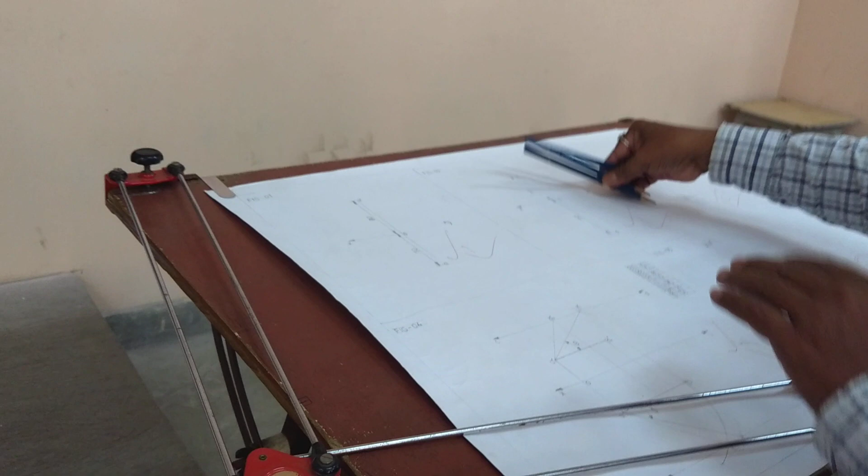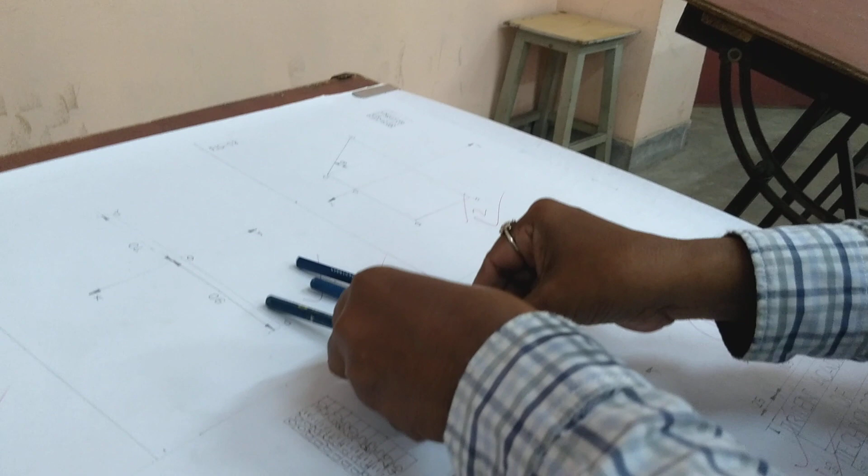Just mark the arrangement also. This is my drawing sheet, 3 pencils. This is the mini drafter. I am also ready. Simultaneously, I will show you the blackboard along with your drawing sheet arrangement. Just mark: mini drafter, drawing sheet, and 3 pencils. Okay, how will we proceed? Just mark.

As per international standard, we have to draw the boundary line of a drawing sheet, because when we purchase a drawing sheet from the market, it may or may not be of proper dimension. That's why we have to draw the boundary line of our drawing sheet. So use your 2H pencil for the boundary line.

Use your mini drafter and draw the bottom boundary line. Suppose this is your mini drafter scale, mark the point here. This gap is 20 mm. From the bottom edge of your drawing sheet, measure 20 mm and mark one point. After approximately 50 mm, mark the second point, also 20 mm from the base of the drawing sheet. Now you have 2 points on the drawing sheet.

Use your large scale and draw the line. Gradually extend that line, right side as well as left side. This is the bottom boundary line. Now come to your drawing sheet. This is the arrangement.

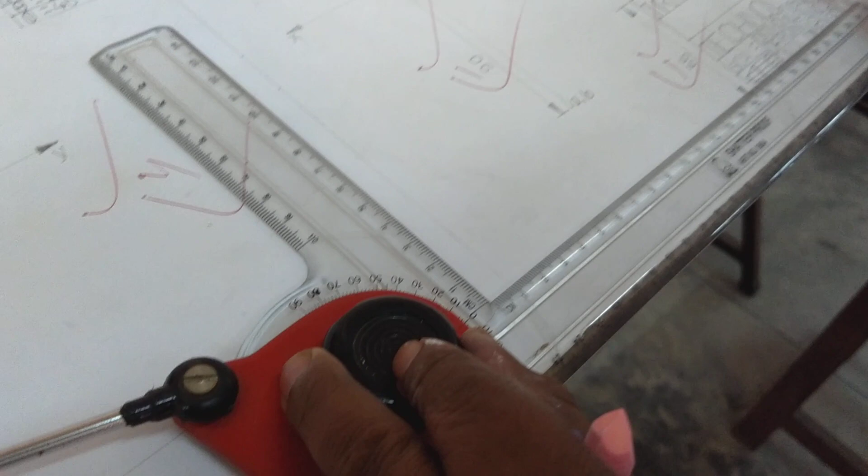Set your mini drafter. This is the long scale. With the help of your vertical scale, measure 20 mm and mark one point. After 50 mm, mark the second point. Now join the 2 points and draw the line. Gradually extend that line to the right side, and similarly extend it to the left side also. So the bottom boundary line is over. Just mark the bottom boundary line.

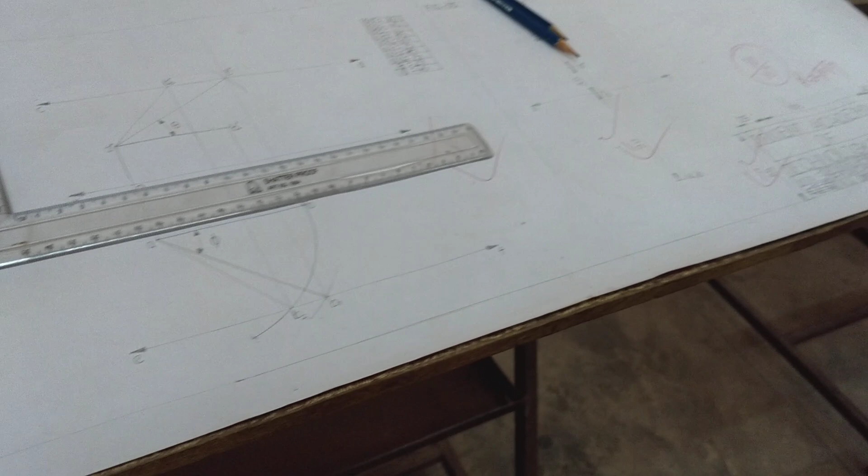Come to the right side boundary line. The right side boundary line is also 20 mm from the right side. With the help of your drafter, mark one point 20 mm from the right edge of your drawing sheet. After 50 mm, mark the second point, also 20 mm from the right edge. Now join the 2 points and extend downward as well as upward. Come to your drawing sheet now.

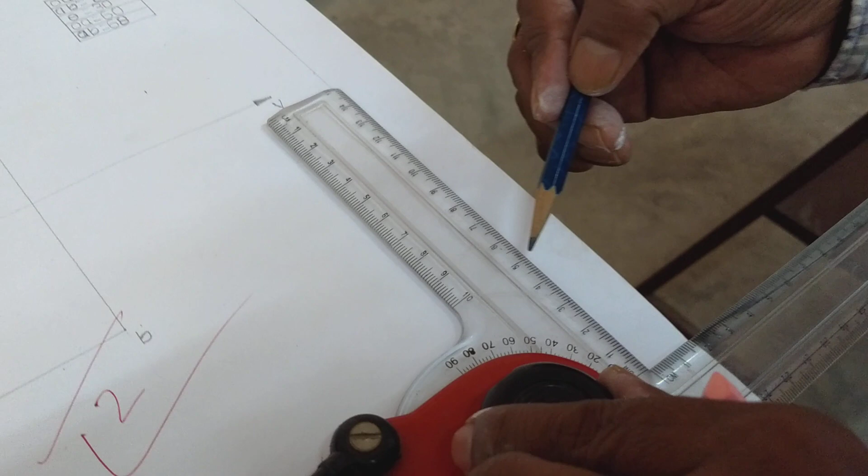From the right side edge, measure 20 mm and mark one point. After 50 mm, again measure 20 mm and mark the second point. Now join the 2 points and draw the line, extend that line upward as well as downward. So the right side boundary line is also over.

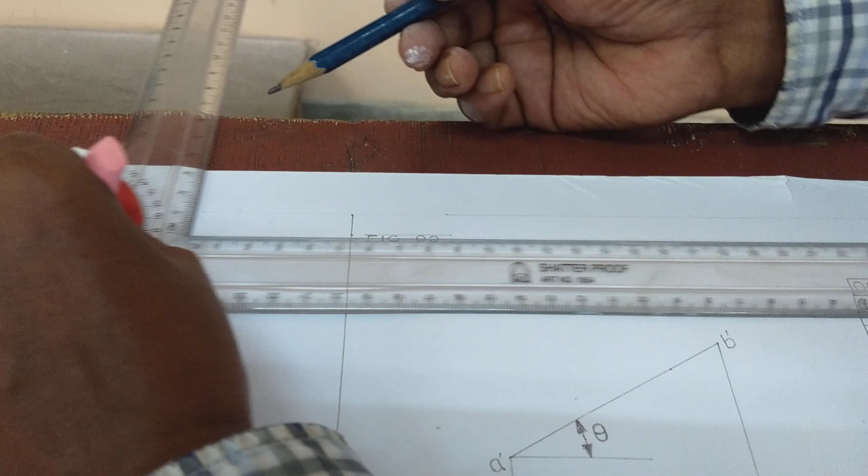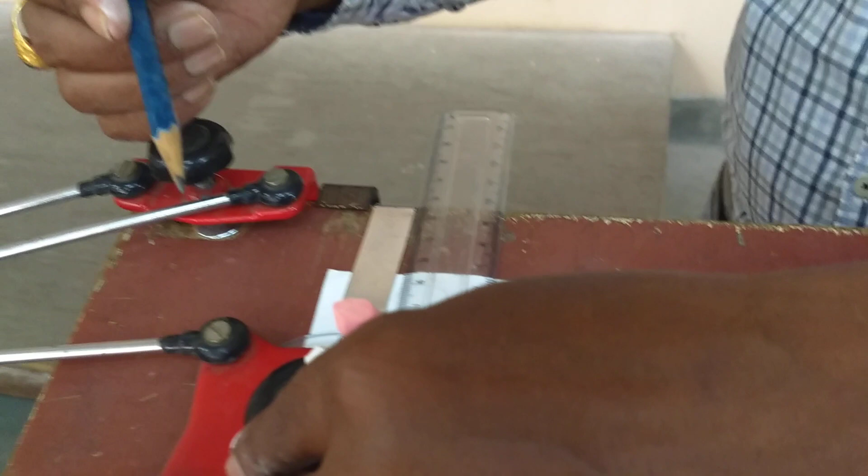Then the top boundary line. Measure 20 mm from the top edge and mark 1 point. After 50 mm, again take 20 mm and mark the second point. Now join the 2 points and gradually extend the line towards the right side as well as the left side. Just mark, here the problem arises, because the drafter will not move comfortably towards the left side. So use your large scale and extend that line. Don't put more pressure upon the drafter. Complete that line towards the left end.

I will do the same thing. I will measure 20 mm and mark 1 point. Measure 20 mm after 50 mm and mark the second point. Extend it towards the right side gradually. Similarly, extend towards the left side gradually. I already told you, in your drawing sheet, when you move towards the left side, the drafter will not move. So use your large scale and extend that line.

Now come to your left side. On the left side, measure 25 mm and mark 1 point. After approximately 50 mm, again mark 25 mm. Now you have 2 points; gradually extend towards the top. Now the problem arises, the drafter does not move. So use your large scale and extend that line. Okay?

And extend that line. Come to the blackboard now. My drawing sheet, that is your drawing sheet, and this is my drawing sheet. Simultaneously I want to show you.

Mark 25 mm as 1 point. After 50 mm, second point, 25 mm from the left side. Now join the 2 points. Gradually extend downward as well as upward. Now if a problem arises, use your large scale and extend it. So the boundary line is over.

Somebody may ask why you draw the boundary line. Because the boundary line is required to convert untrimmed size paper into trimmed size paper, so that we get the perfect prepared drawing area. This is my perfect prepared drawing area, and outside the boundary is not my area. So what I will draw only inside my area, that should be perfect. To get a perfect prepared drawing area, the boundary line is required.

Now we will draw the title box where you write your personal data. Same thing, same pencil. Just measure, this measurement is 65 mm. From this point, measure 65 mm. That is the breadth of the title box. And you mark, draw the line with the help of your drafter.

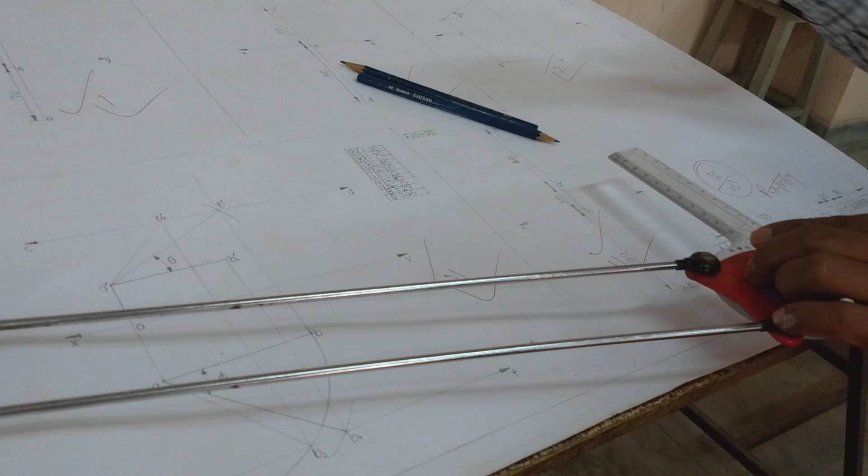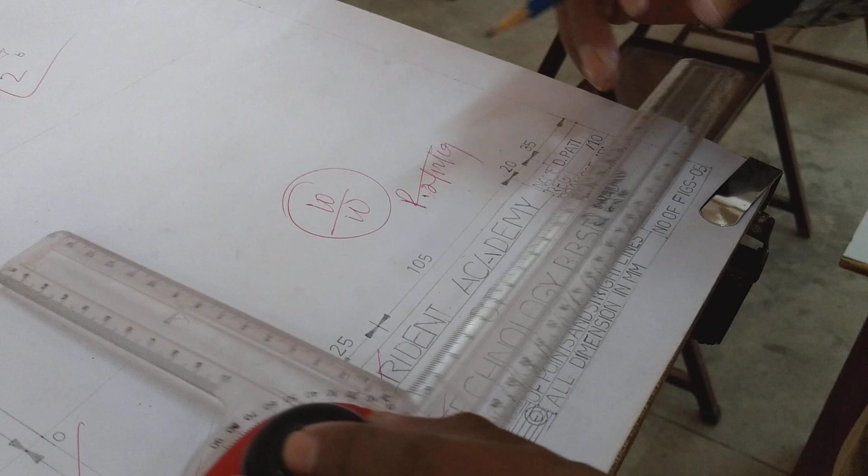Just mark how I will draw my title box. You measure 65 mm from the bottom boundary line, anywhere, no problem. Mark one point at 65. Now you draw the line, and the length should be 185 mm, and close the box. This is the position of the title box. Breadth is 65 and length is 185 mm, as per international standard.

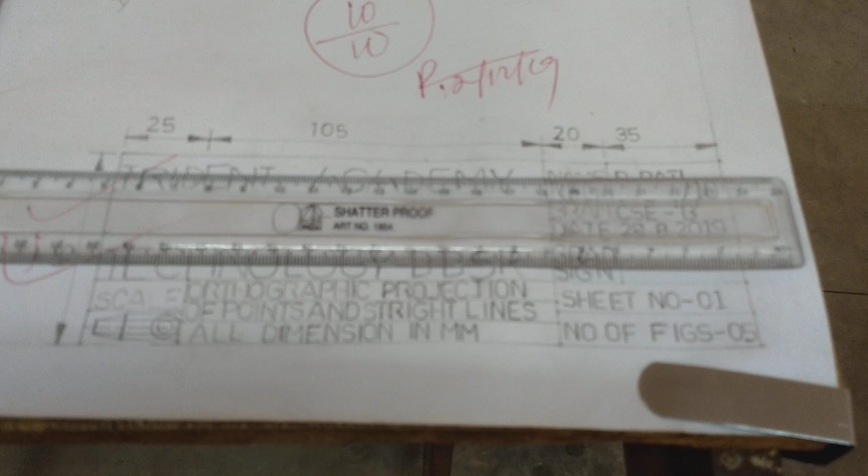Clear? So what will you draw inside the title box? Just to mark. Now the pencil is changed to a 1H pencil, because I want to draw the construction line, that is the construction of the title box. For construction lines, a 1H pencil is used.

Now you measure 20 mm from the bottom edge of the drawing sheet, that is the bottom boundary line. 20 mm. We always tell the dimension in mm, because mm is the unit of dimensioning. And with the help of your drafter, draw the horizontal line gradually.

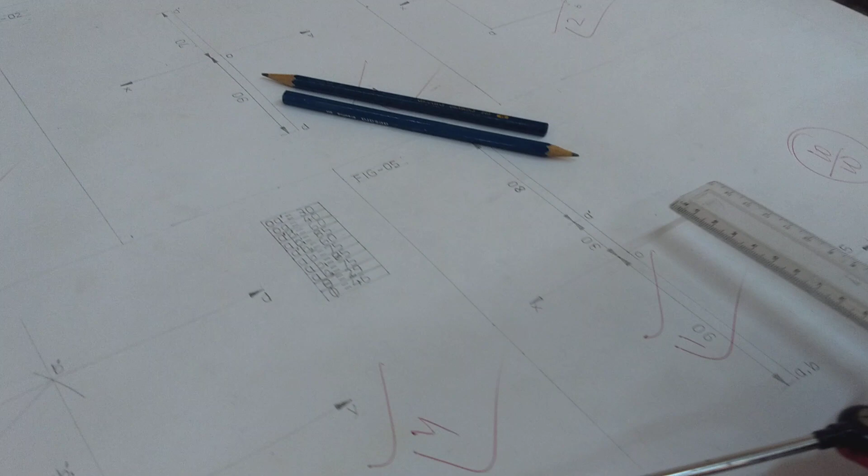Okay, similarly, come to your drawing sheet. Just mark 20 mm from the bottom and draw the first line. Clear? Now...

From the right side boundary line, you draw one vertical line, that is 35 mm. This gap is 35, vertical line. The vertical line is 35 mm. Okay, after that, 20 mm.

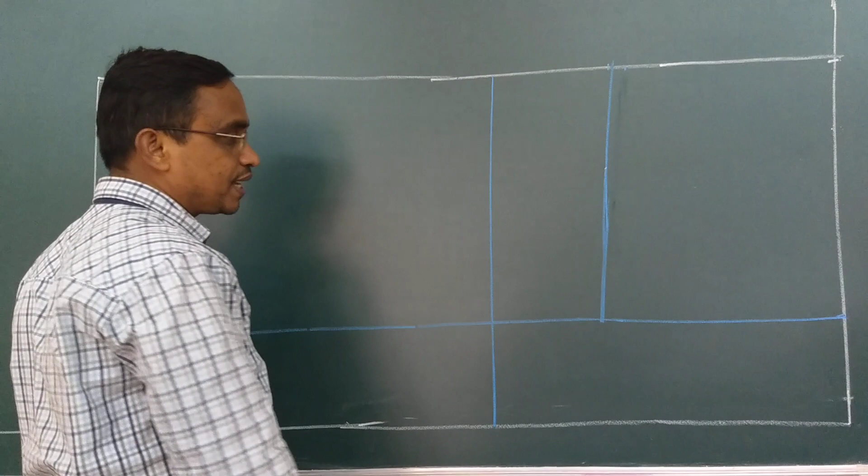Extend that one till the bottom boundary line, and divide this 20 mm into two equal parts, that is 10 and 10. Then you divide this one, so 10 mm from the top, you draw the next line.

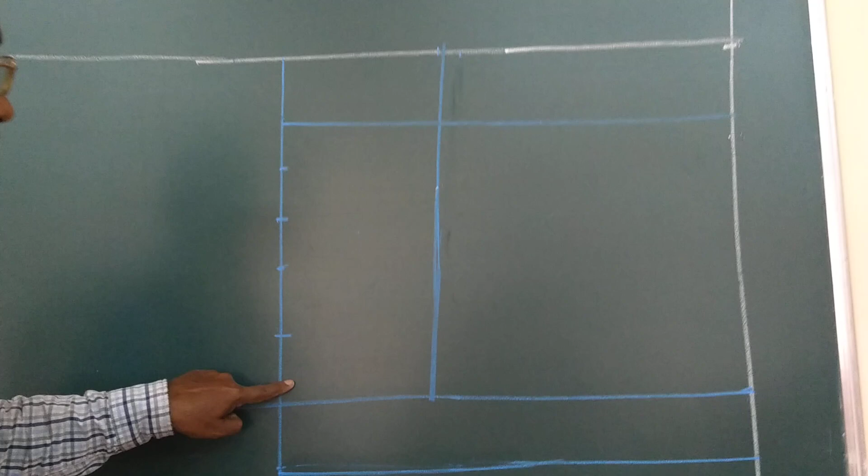Then 7 mm, you mark 7 mm, 1, 2, 3, 4, 5, 7 mm you have to mark, because totally 65: just to mark, 10 plus 10, 20 plus 35, 55 plus 10, 65. Accordingly, you draw the lines.

Then 7 mm, next 7 mm, then 7 mm, automatically this one is 7 mm. 1, 2, 3, 4, 5. 7 into 5 is 35, plus 10 is 45, plus 10 is 55, plus 10 is 65. Total width of the title box is 65. Accordingly, you divide.

Now come to this side, from the left side boundary line, you measure 25 mm and divide into two parts, that is 10 and 10. Come to this part, this is 20, divided into three parts, that is 7, 7, and the last one is 6. So 7 mm, 7 mm, last one is 6 mm.

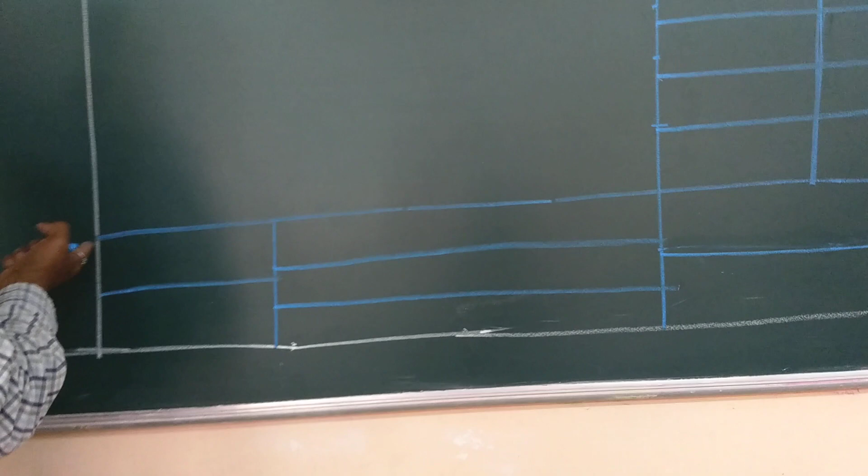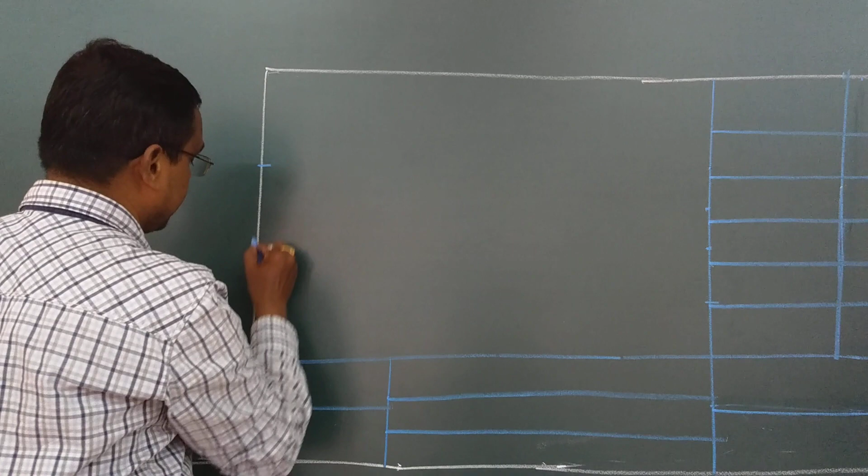Come to this part, this is your 45 mm, divided into three equal parts, that is 15 mm, 15 mm, and 15 mm. First one is 15, 15 mm and 15 mm. Beautiful.

This is all about the constructional details of the title box. Then we will put the dimension, and I already told you the aligned method of dimensioning and chain or continuous process of dimensioning we have to follow.

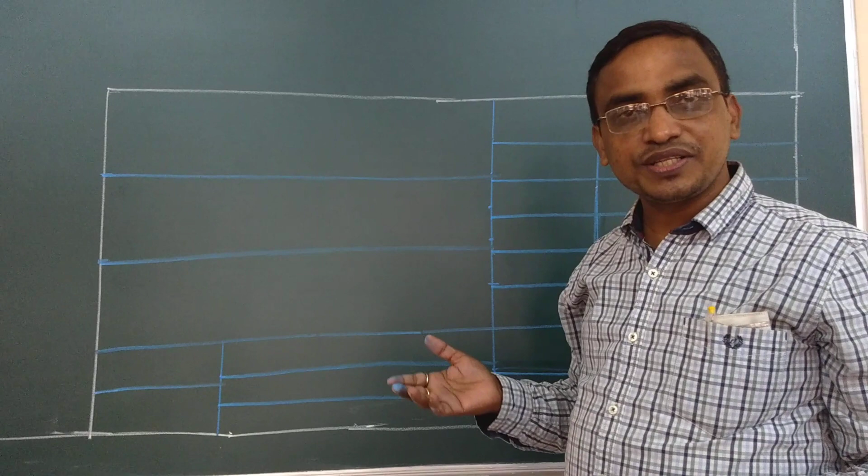Just mark, pencil change again. For dimension line, use your 2H pencil. How will I draw the dimension line? As per international standard, the gap between outline and dimension line is 8 mm. So you mark 8 mm anywhere. Second point also you take 8 mm from the outline of the title box and draw the dimension line. This is the outline, this is the dimension line, gap is 8 mm.

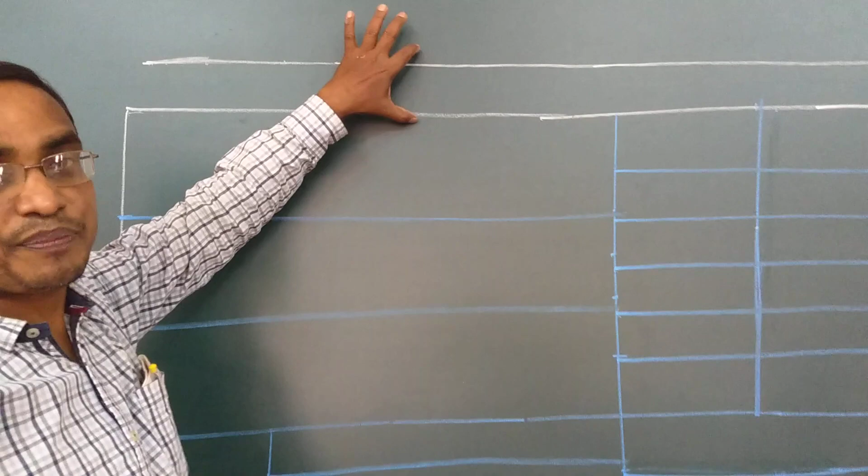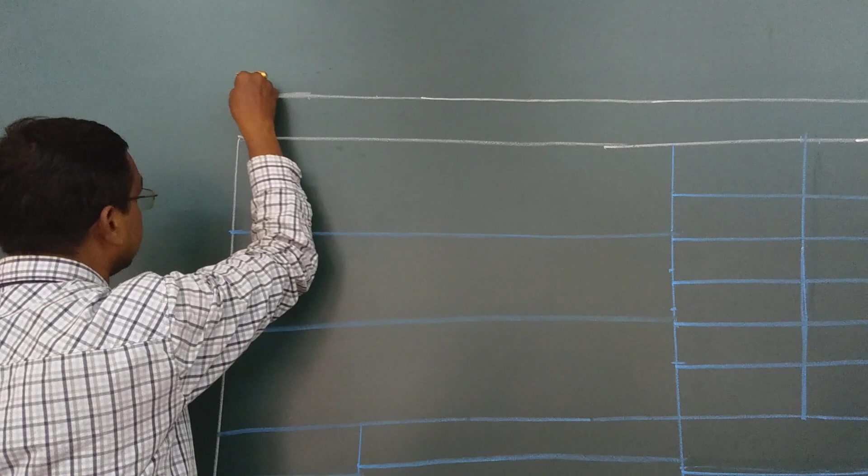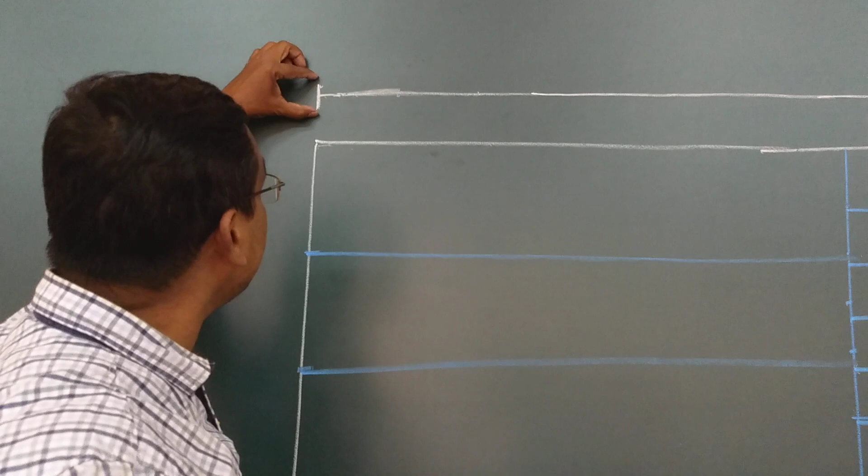Then you put the extension line here, just to extend this line. You may take this 2 mm above, 2 mm below. As per international standard, the extension line is approximately 3 mm, but practically we take 2 mm above and 2 mm below.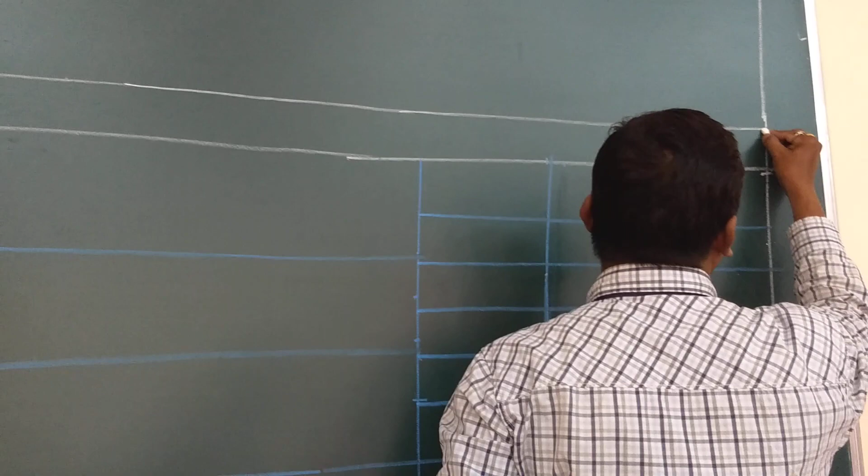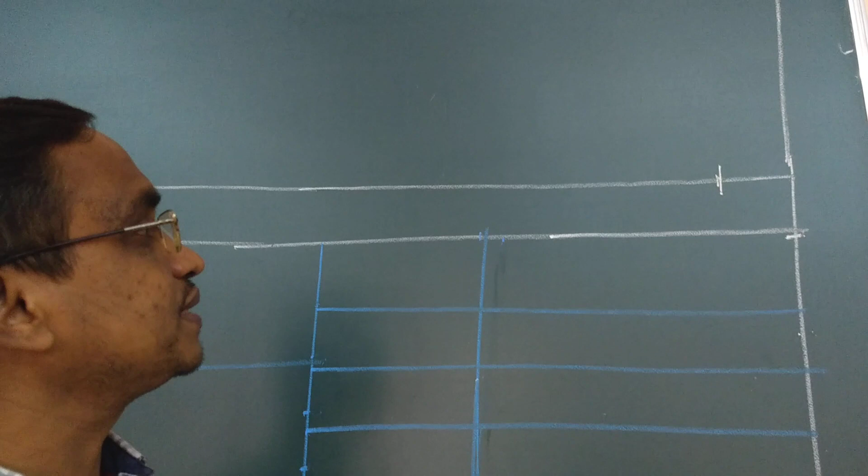Then you put the arrowhead. How do we draw it? Same pencil, 2H pencil. From this point, measure 6 mm. With the help of your drafter, draw a vertical line, 1 mm above the dimension line, 1 mm below the dimension line. Total width is 2 mm. Use your large scale and simply join. Now the arrow is closed. Then you have to fill it. Fill up the arrow with the same 2H pencil. Now you got the perfect arrow.

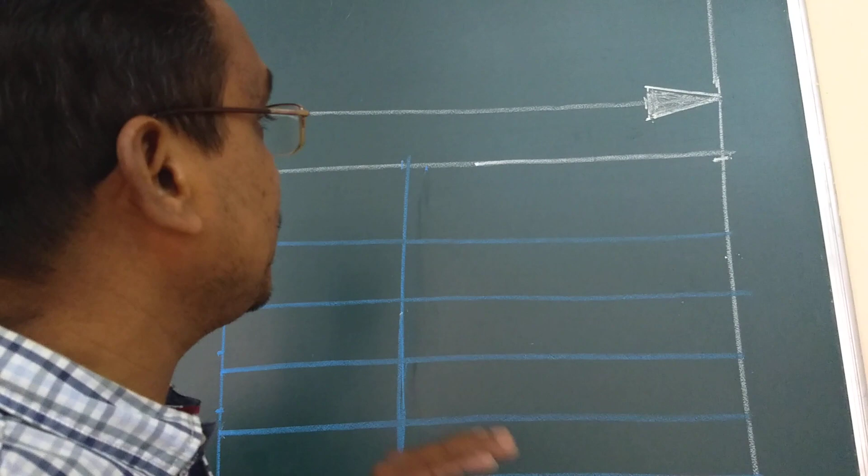So what is the dimension of the arrowhead? This is the length of the arrow and this is the maximum width of the arrow. Length ratio to maximum width is 3:1. This is the length of the arrow, just to mark clearly, and this is the maximum width. The ratio is 3:1, meaning 6 mm length divided by 2 mm width, maximum width. So the ratio is 3:1. When I say draw the arrowhead, always maintain the same dimension throughout your drawing sheet.

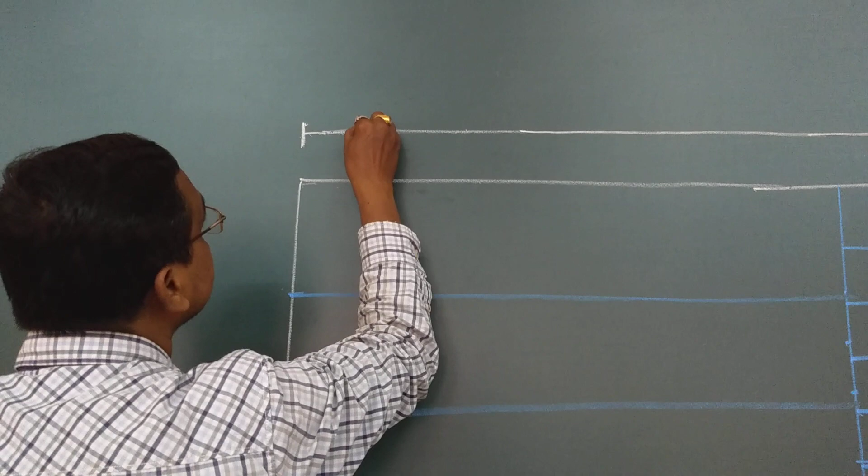I will also draw the same arrowhead here, away 6 mm, with the help of my vertical scale, 1 mm above, 1 mm below. Then you close the arrow and fill it up.

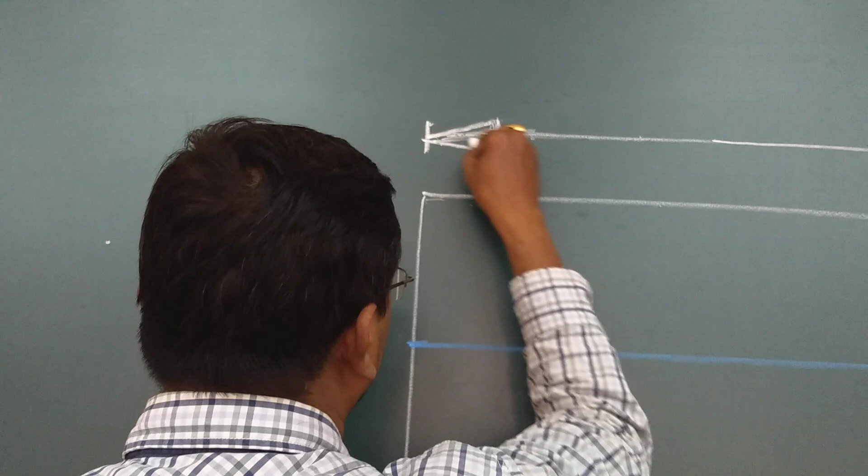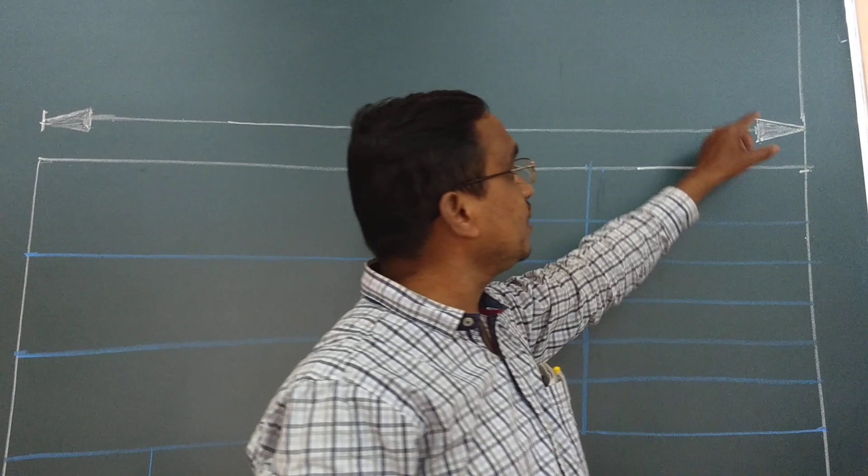Suppose in your viva it may be asked, what is the dimension of the arrowhead? Always tell, sir, length ratio to maximum width is 3:1. Don't say 6 mm length, 2 mm width. As per our space, I choose length 6 mm and width 2 mm, but always the ratio is 3:1.

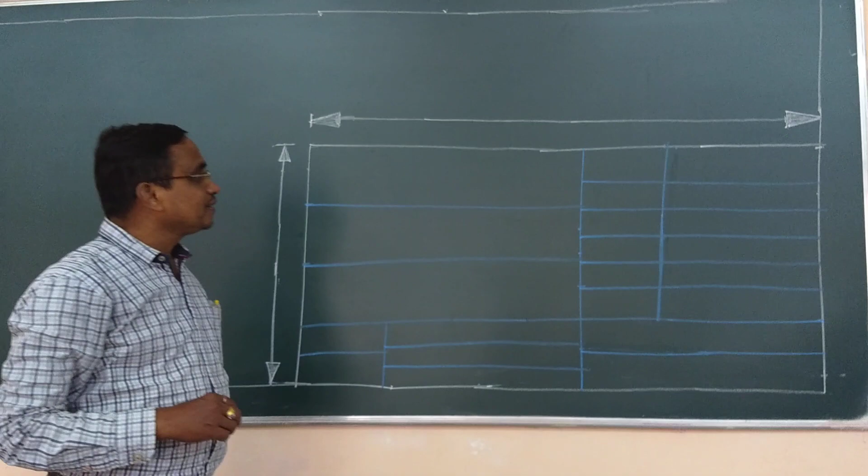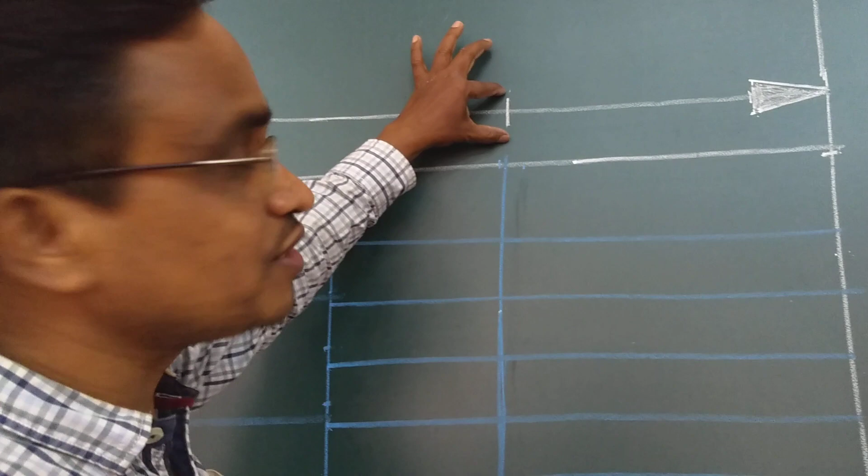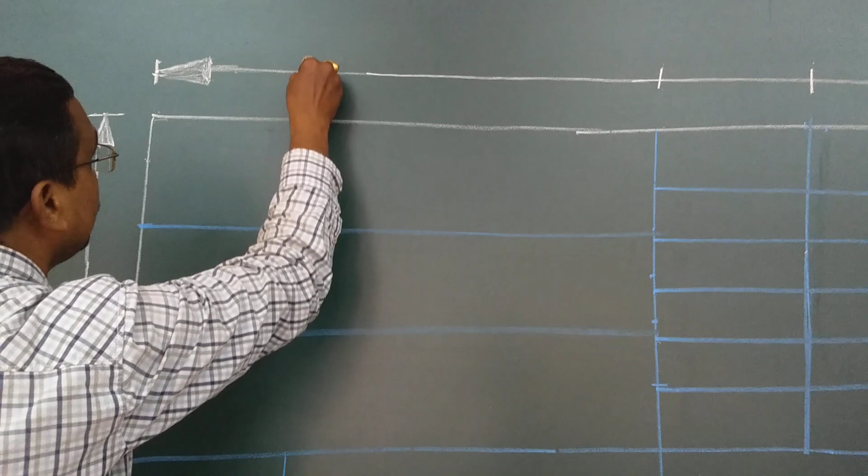Same thing I will draw here also. From this line, mark one point 8 mm. After some distance, approximately 40 mm, mark the second point and draw the dimension line. Extension line: just to mark, extend this line, 2 mm above, 2 mm below. Similarly extend this line, 2 mm above, 2 mm below, and put the same arrowhead.

I already told you, same measurement always you take throughout your drawing sheet.

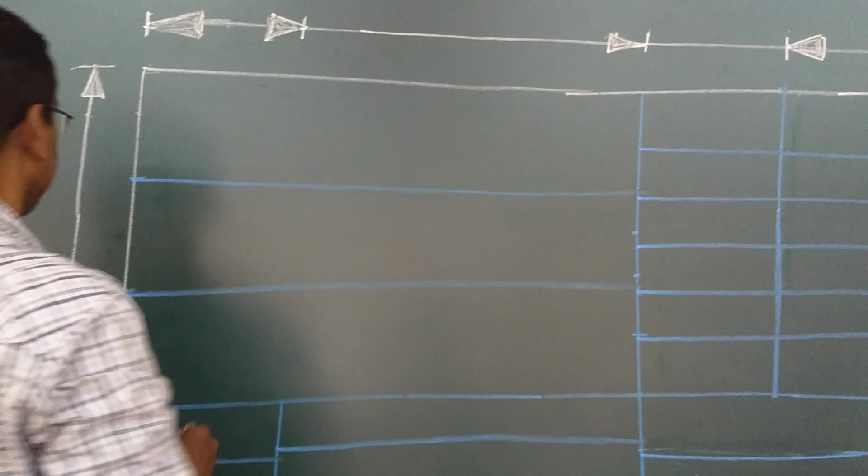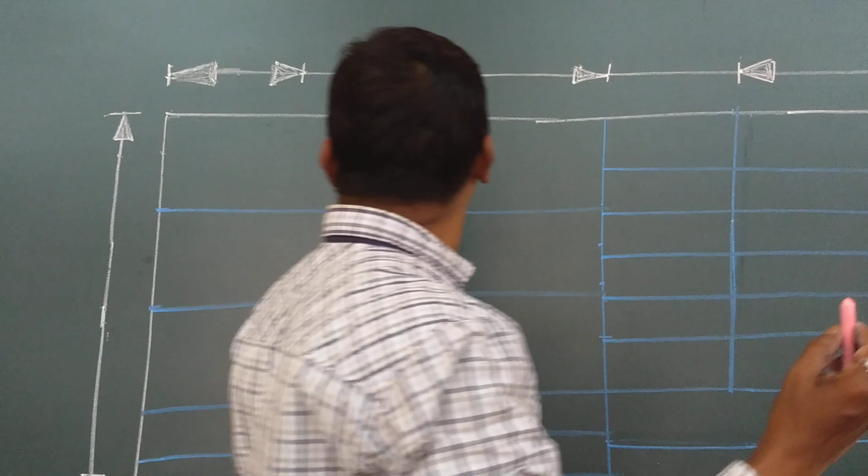Now again pencil change, HB pencil to write the text. So take the HB pencil. Write down 35. How will we write 35? Always maintain the aligned method. Aligned method means just above the dimension line, mark the midpoint. Left side of the midpoint write down 3, right side 5, making 35. You may use your 5 mm size pencil, but always use single stroke, vertical letters.

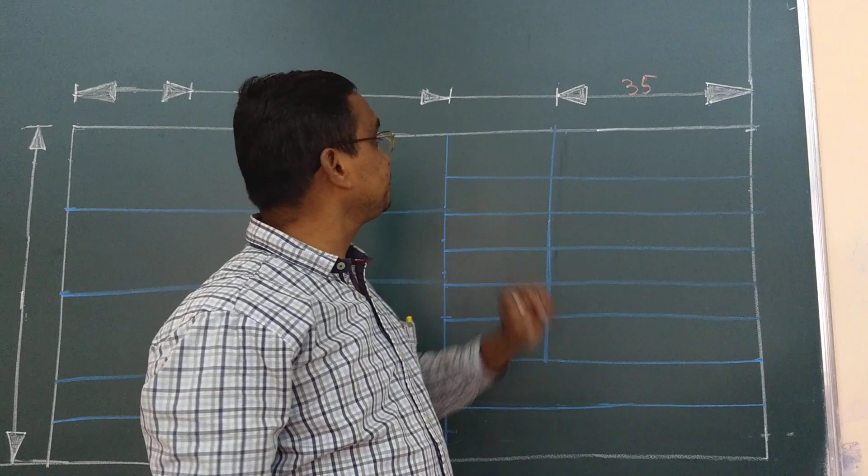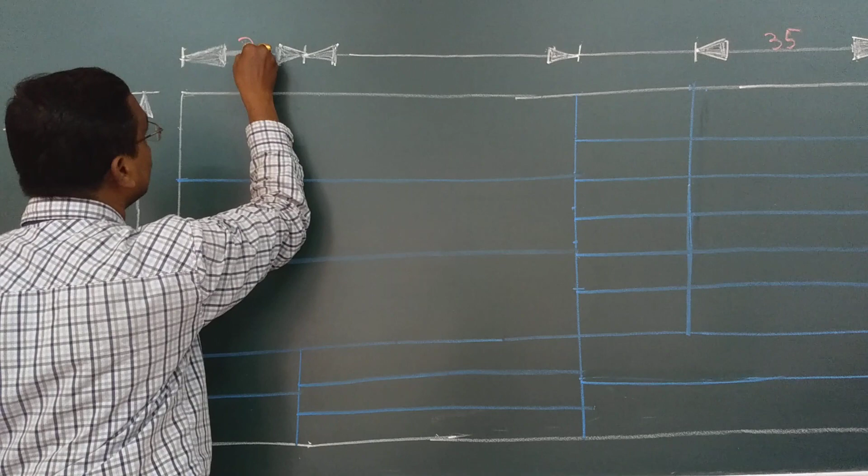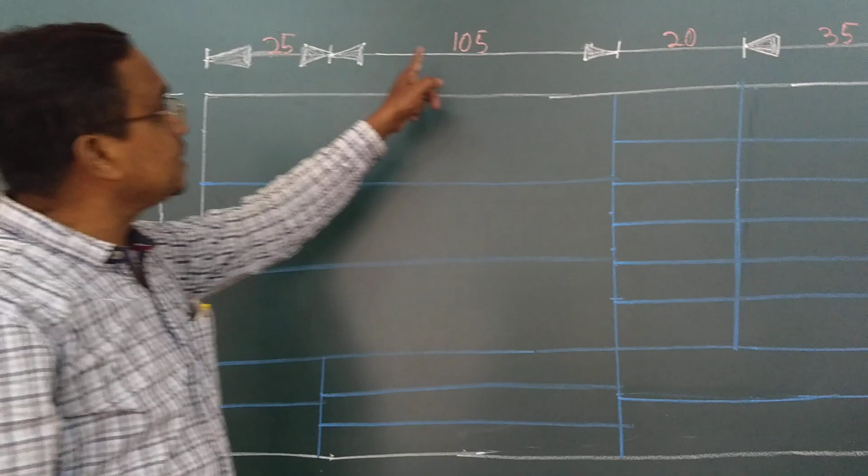Similarly, here also draw one arrow. Write down 25, same procedure: mark the midpoint, left side write 2, right side write 5, making 25. Here, same procedure, write down 20. Here, same procedure, mark the midpoint, put 0, left side write 1, right side write 5, making 105. So 25, 105, 20, 35, and you add, that is 185.

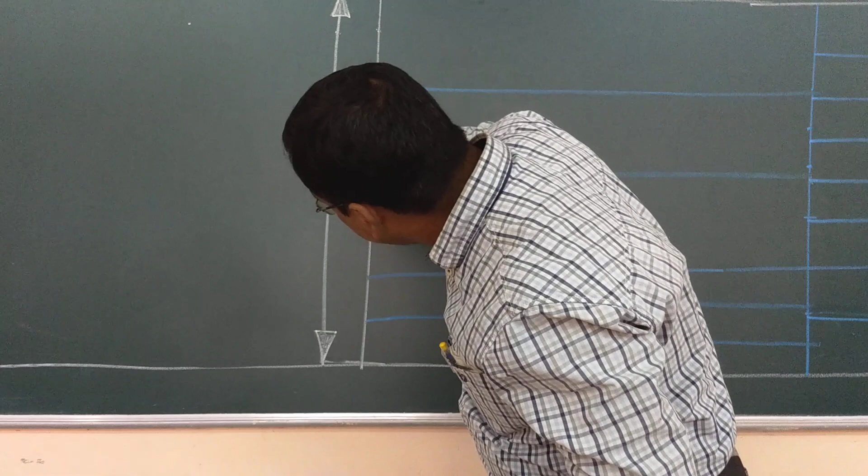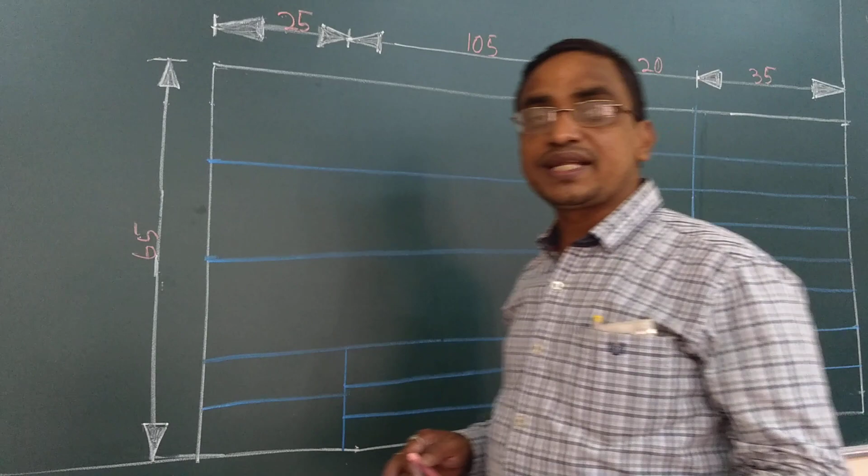Similarly here, mark the midpoint, below the midpoint write 6, above the midpoint write 5, making 65. This is the aligned method I already told you. So this is all about the dimensional details of the title box.

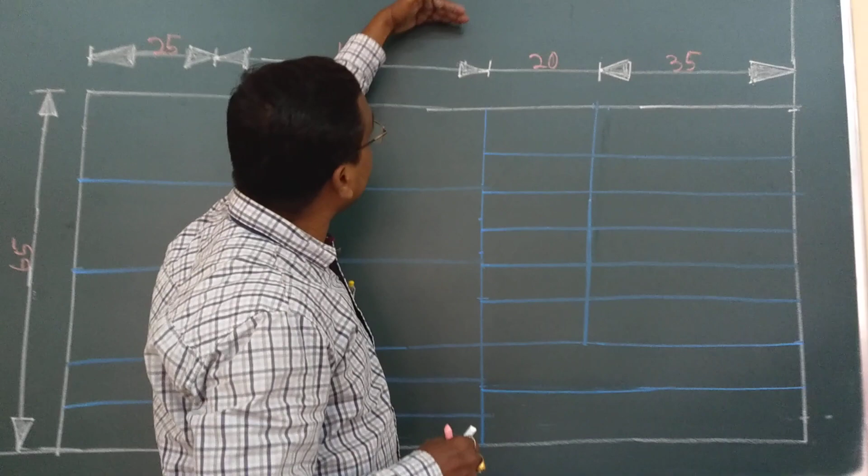This is one method. In the second method, you omit 20 and put one further dimension line and write down 185. First dimension line to second dimension line is also 8 mm. You may follow that process also.

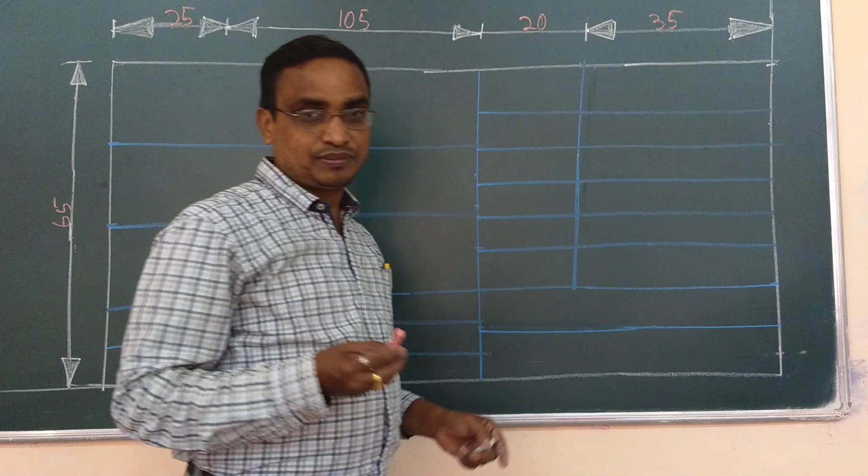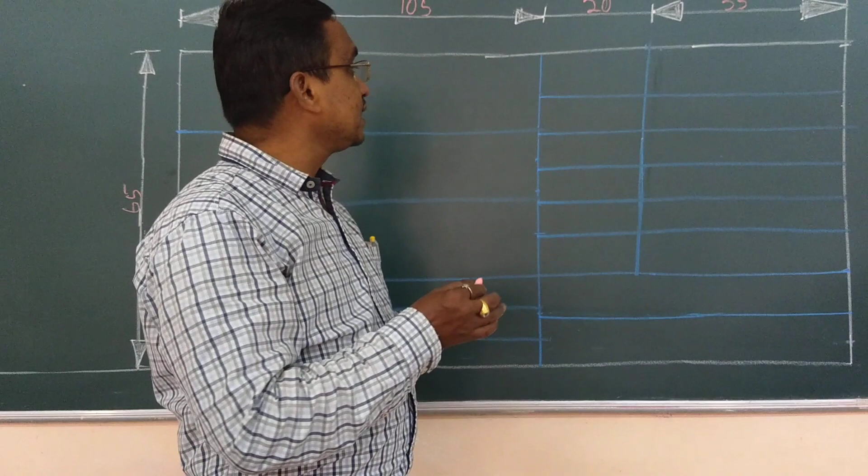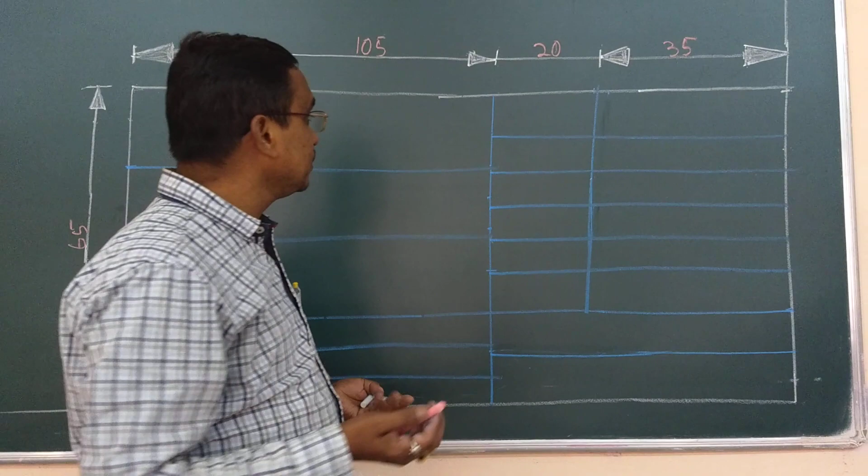Now what will we write in the title box? Use an HB pencil, you may use your 5 mm size stencil, or write free hand, but the lettering should be clear and uniform. If you maintain that with free hand, no problem, but size is 5 mm. Better to use a stencil for uniform letter style. And here I write down the name.

Just mark it. Capital letter, single stroke letter, vertical letter. No italic style, no design, only plain letters you have to write.

Suppose your name is Harichandra Sahu. Harichandra Sahu, you may write H dot Sahu.

Then registration number. You may write REG, or if space is not available, write only RE dot NO. Hardly 4 letters are possible because 5 into 4 is 20. Registration number RENO. Leave here if you are not getting your registration number.

Write down your class roll number instead. Say your class roll number is 25, write down 25. Name, registration number, then branch.

BRAN is possible, write down dot here. Branch, like say CSEA, for example, CSE hyphen A1 or A2 you may write. Suppose your branch is CSE A1, write down CSE A1. If CSE A2, write here CSE A2.

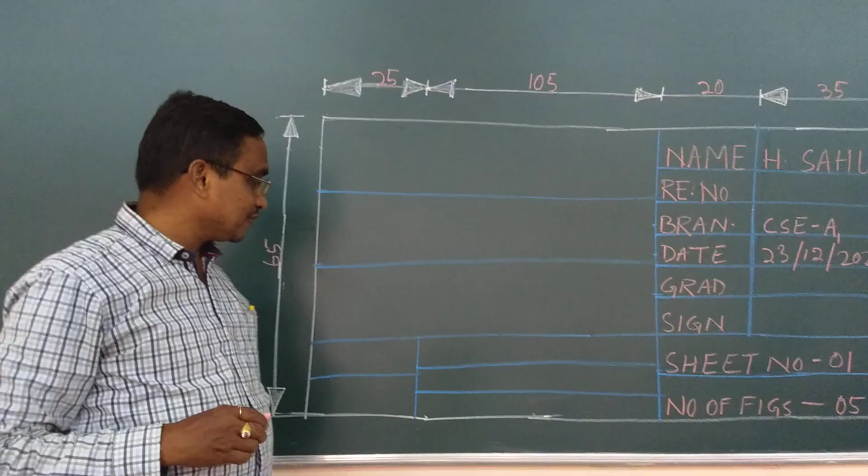Number of figures. Then here you write down the title of sheet 1, that is Orthographic. Same pencil, HB pencil.

Then 5 mm gap you will take. Projection of points. Again 5 mm gap, and again 5 mm gap, straight lines. Orthographic projection of points and straight lines.

Then here write down the unit of dimensioning, meaning all dimensions are in mm. All, again 5 mm gap, dimensions, again 5 mm gap, are, then 5 mm gap, small mm. And here the letter size changes, that is 10 mm. You may use your 10 mm size stencil, same HB pencil.

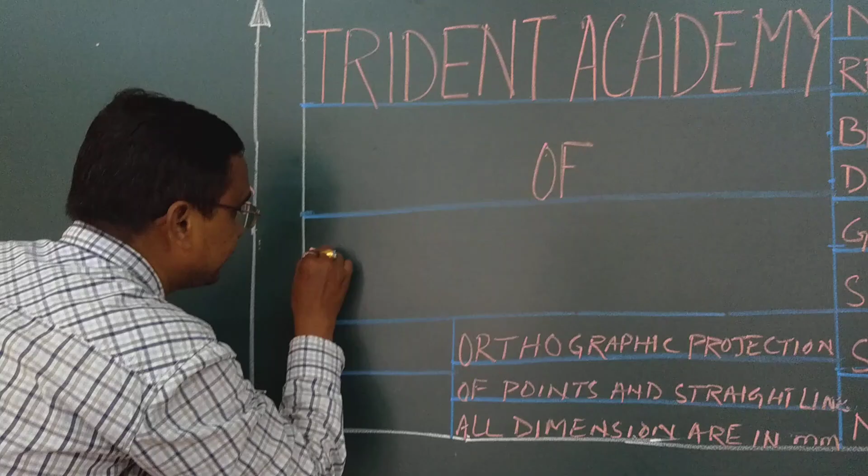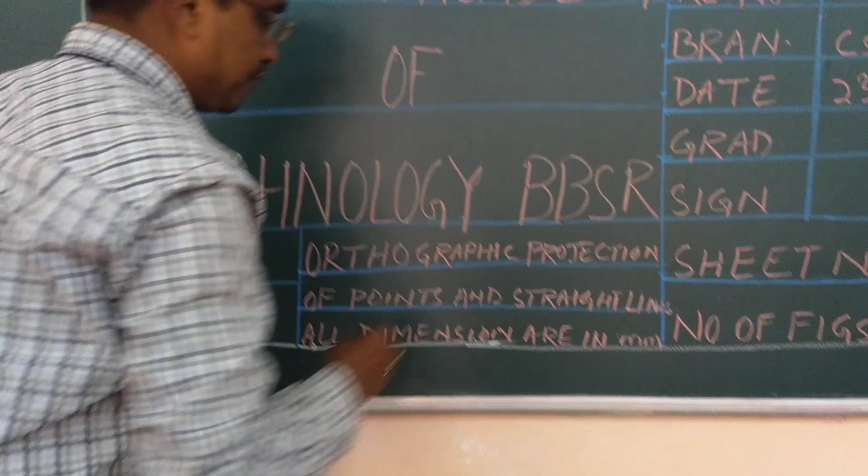And here I have the name of the college, that is Trident. After Trident, you take 10 mm gap, then Academy. Then here write down 'of Technology', again 10 mm gap, then BBSR.

BBSR. And here we write down scale, 5 mm letter size, scale dot hyphen 1:1. What is scale we will discuss in the next class.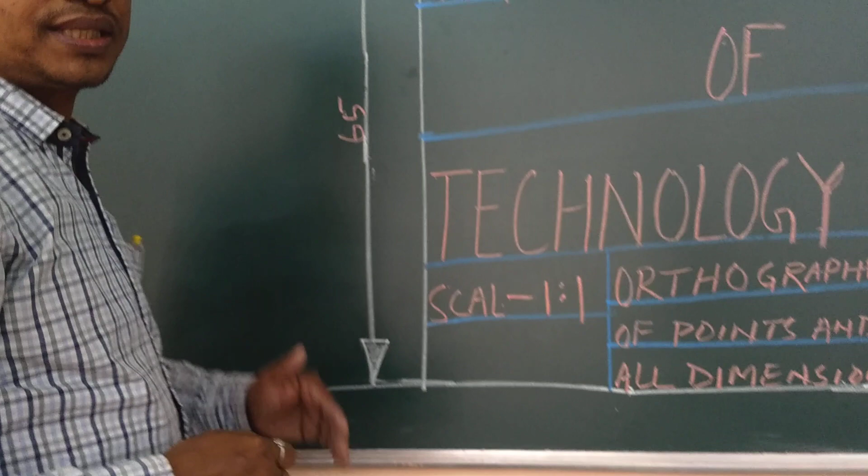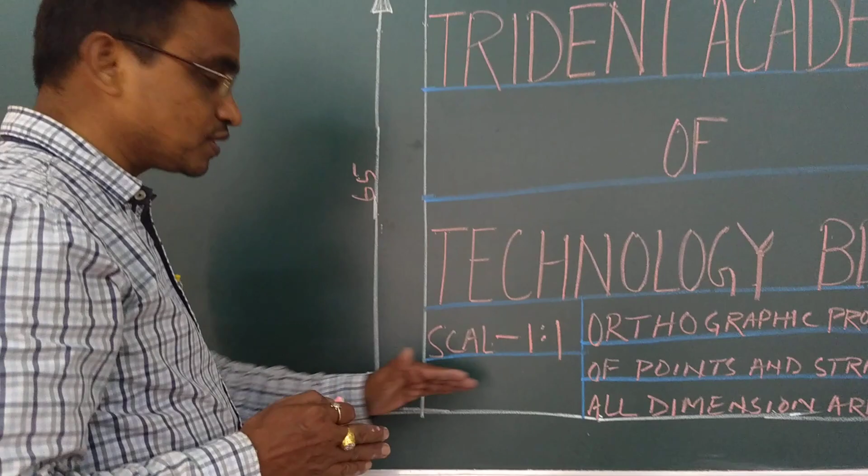And here you draw the first angle symbol. Also we will discuss clearly in the next class. Only today we remember how we draw the first angle symbol. First we draw the center line in the middle.

This is 10, half of 10 means 5 mark. Then 2 mm gap, pencil change, 2H pencil. 6 mm line, 2 mm gap, 2 mm line, 2 mm gap, 6 mm line, 2 mm gap, 2 mm line.

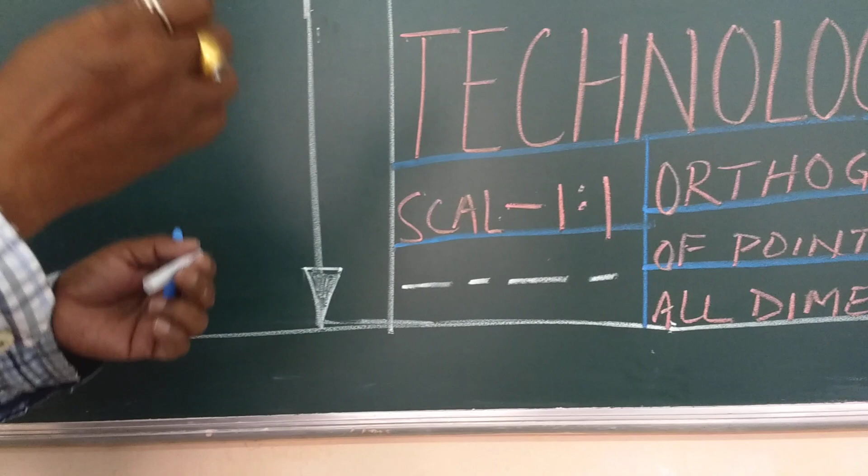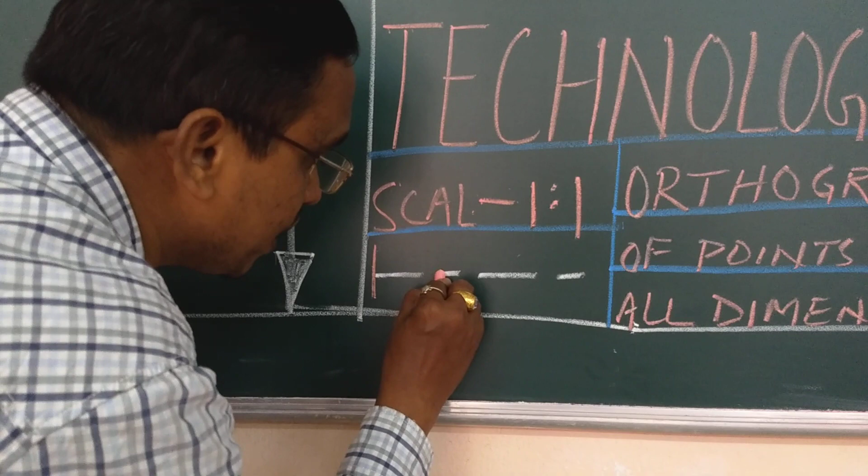Again pencil change, HB pencil. Draw here perpendicular line, 2 mm above, 2 mm below. After 8 mm, 6 gap is 2, 8 mm. Draw the second line, 4 mm above, 4 mm below, and simply you join.

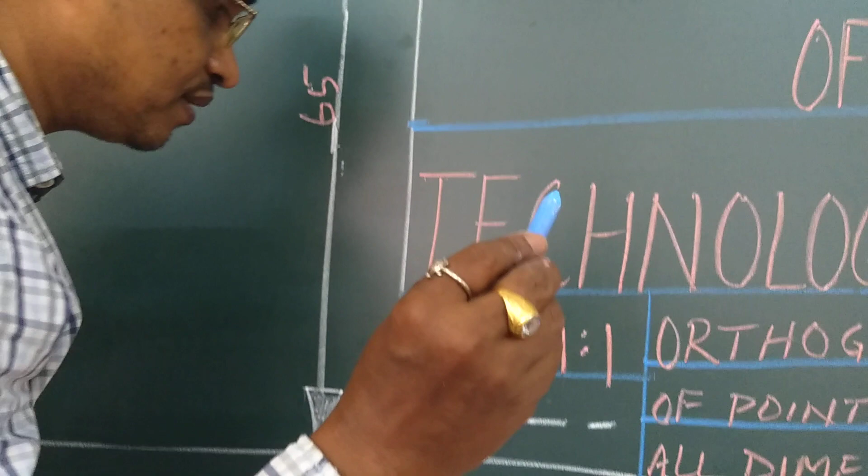Then again pencil change, draw the projection line. From this point, draw the projection line. From this point, draw the projection line. After 10 mm, 2 gap is 2, 4 plus 6, 10.

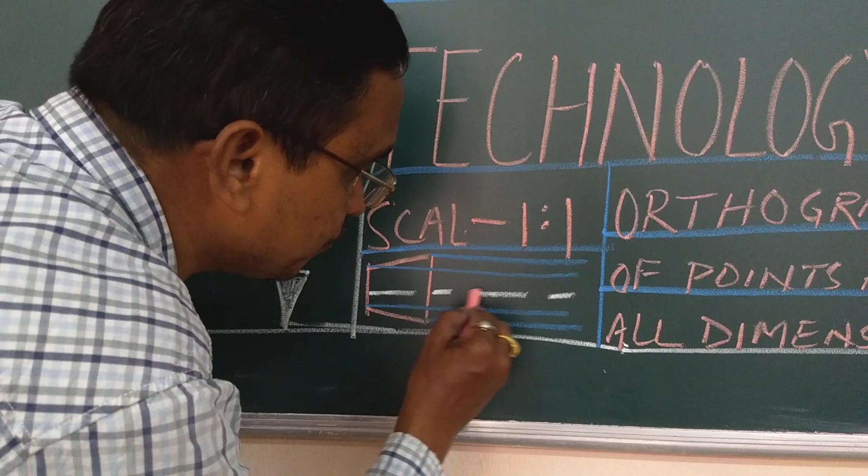Mark the center point and use your circle template and draw the first circle. Dia is 4 or radius is 2. Same center, second circle, dia is 8 or radius 4. So this is the first angle symbol.

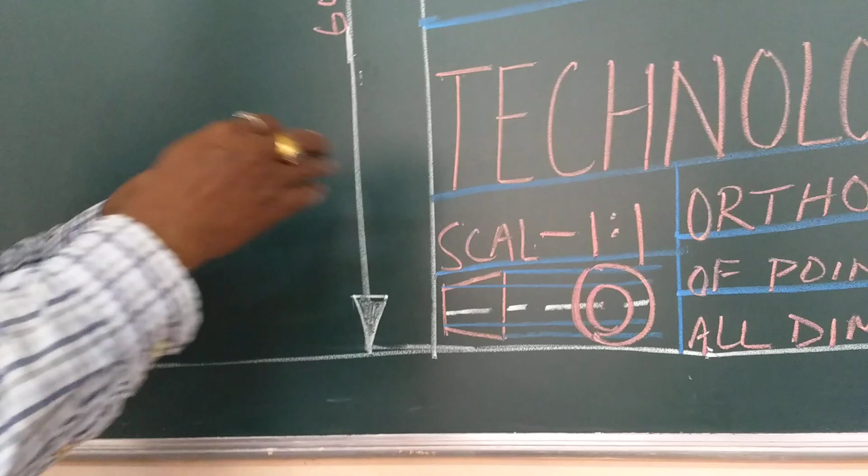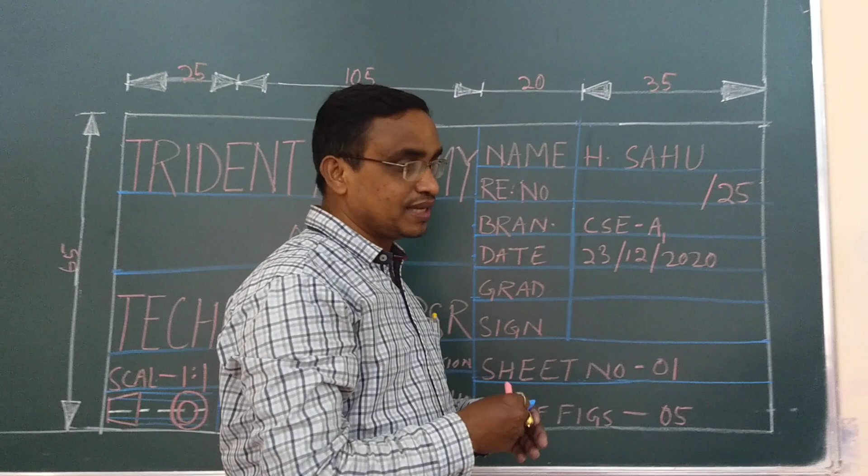This is all about the boundary line and title box, and it is common for all the drawing sheets. Only a little bit change, and just mark here everything I mentioned: the first angle symbol, scale, name of the college, title of the drawing sheet, and your personal details.